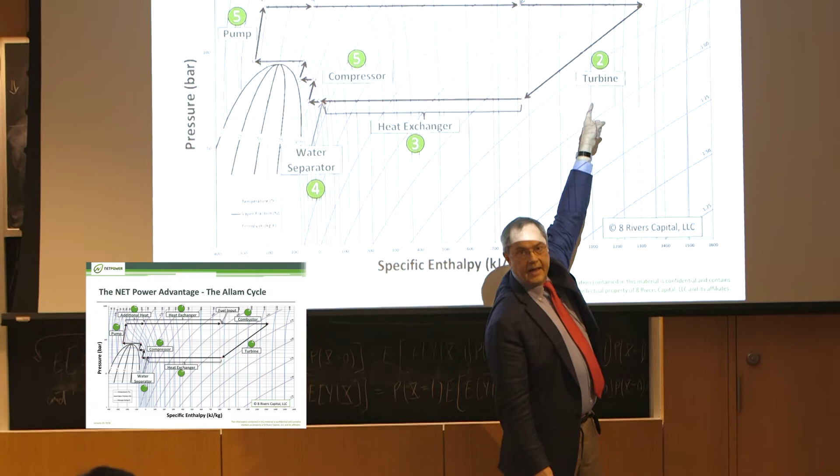So if we go from a turbine, we'll talk about how we do this, but if we go from this point here on the turbine, see where I say that little black arrow at the far right? If we go from this many enthalpy units down to here when we come out of the turbine, we gained this much energy. The left-right is the amount of energy we gain. If we're moving to the left, we gain it. If we're moving to the right, we're putting it in.

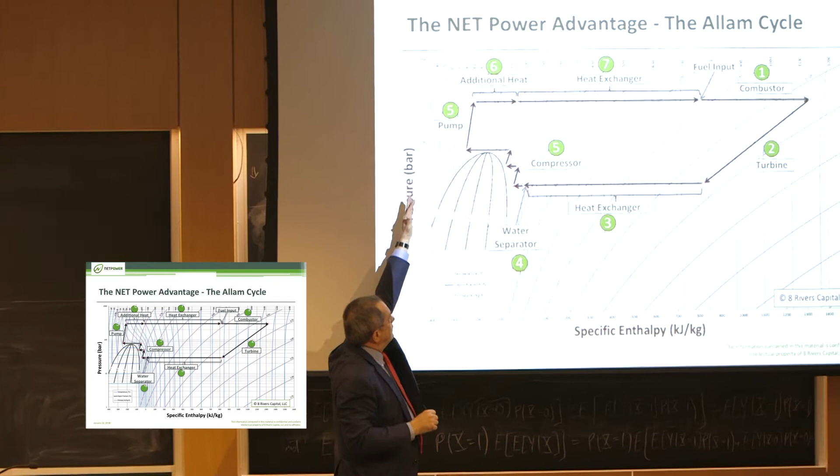The vertical axis is pressure. It's a log scale here. This is what's called 30 bar, or roughly 30 atmospheres. 1 atmosphere is roughly 15 pounds per square inch. So 450 psi at 30 bar, 30 atmospheres. The top end of this thing is at 300 bar, so 4,500 psi. And all we're doing is we're moving this fluid around this cycle.

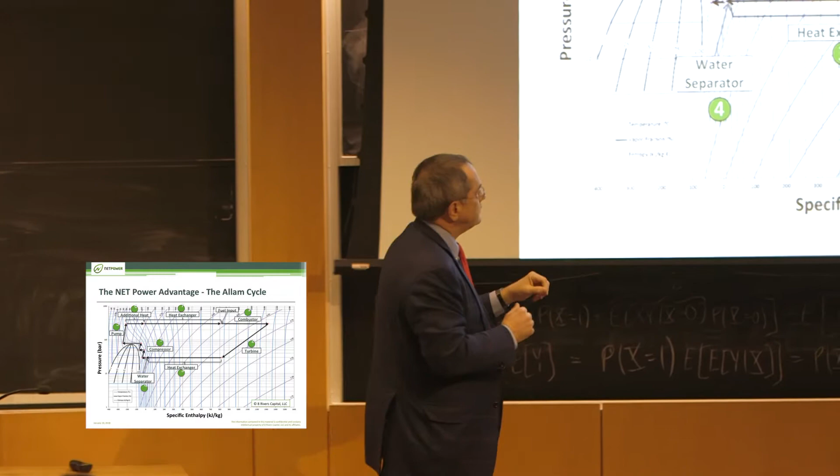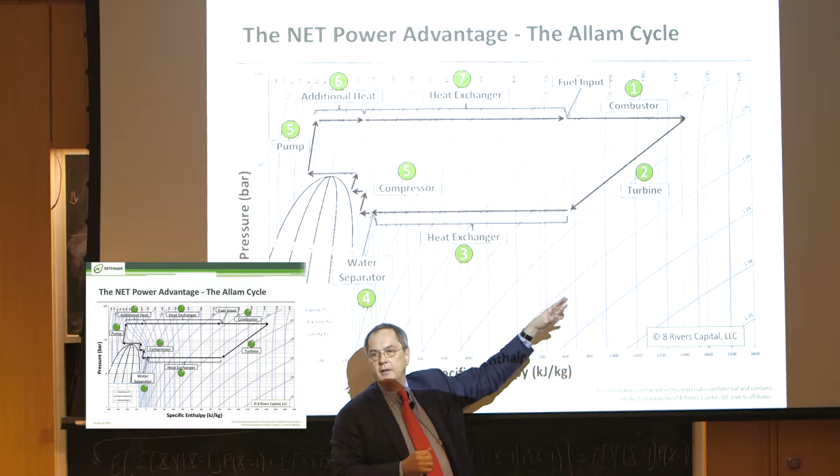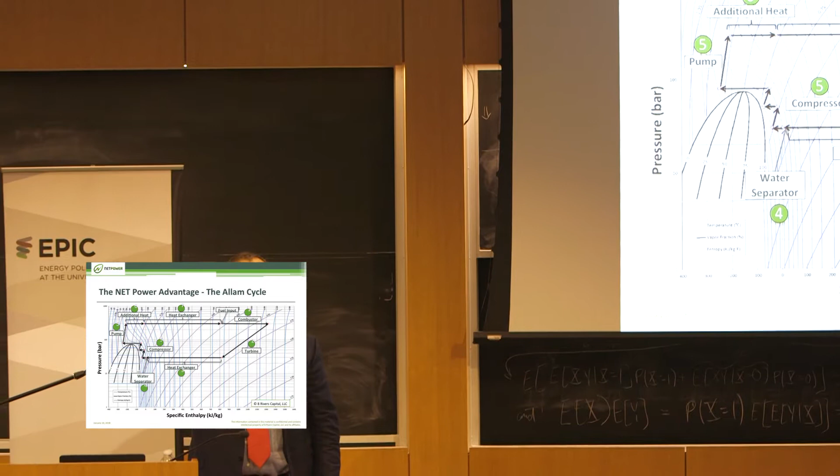Some more milestones that you should know on this chart. These blue lines are temperature isotherms. And you can see as long as we're on the right-hand part of the chart, temperature and heat are roughly the same. But then they start wrapping around this thing on the left here. What is this thing on the left? Well, it's called the biphasic dome. Above that dome, carbon dioxide is what is called supercritical. And you can see that dome comes in just a little above 80 bar.

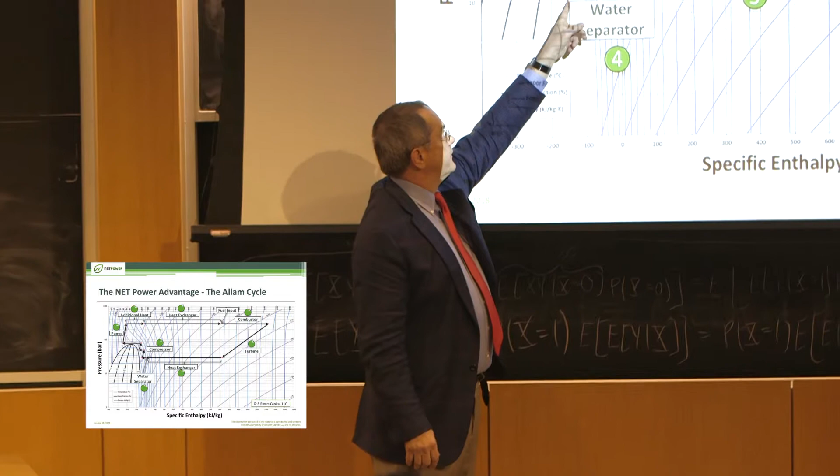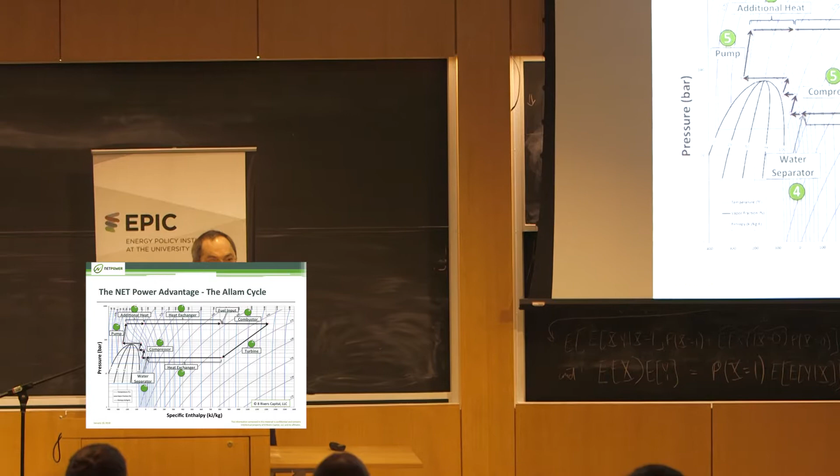Above that dome is supercritical. Below that dome to the left, CO2 is a liquid. Below that dome to the right, or out to the right of that dome, is gas. And in through here, it's biphasic. Here it's 0% gas, 25% gas, 50% gas, 75%, 100% gas. And for those of you who think back to your thermodynamics, the width of that dome for that given pressure is what is known as the heat of condensation or the heat of evaporation. It's the boiling point for CO2. How much energy it takes CO2 to go from liquid to a gas.

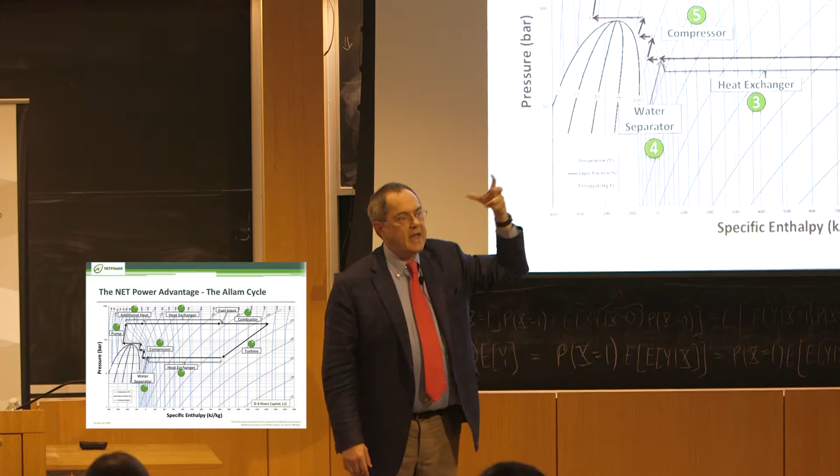So once we start going around this, it's pretty simple. The middle part of this is just simply a heat exchanger. It's like a car radiator. We're going from cold on the left to hot on the right. And then we fire it up at the top of that triangle that sort of looks like the state of Tennessee. We fire it up, and we go that final distance with heat that's added from our fuel. We take it, we expand it through the turbine.

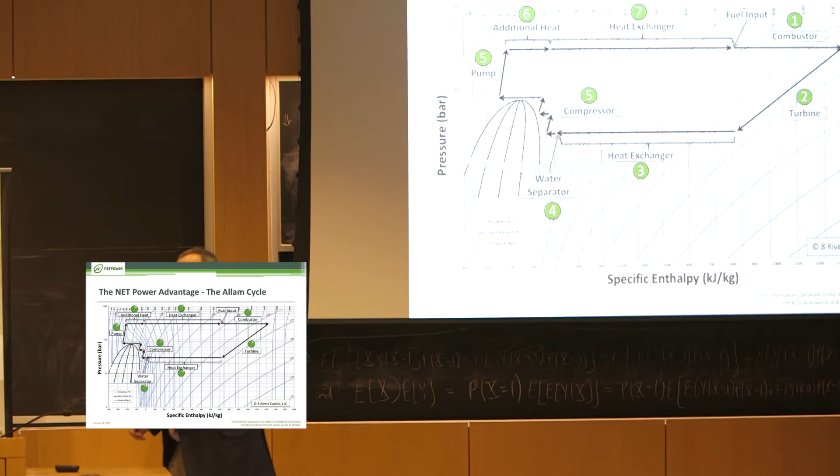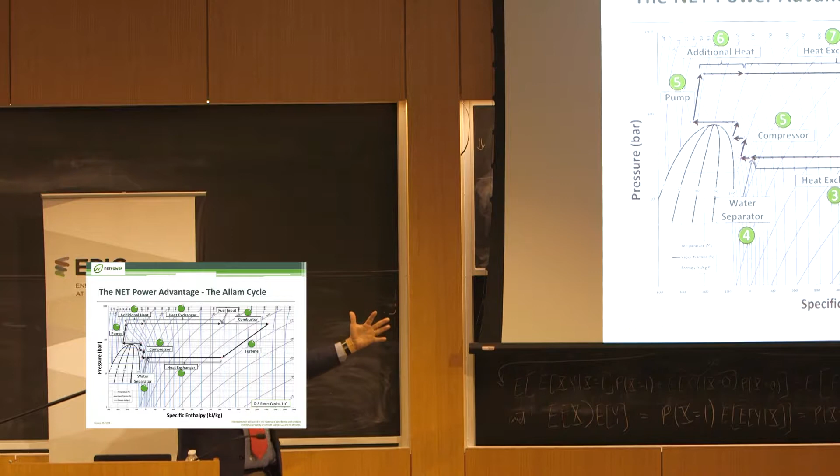Now we talk about the other lines, the purple lines on here. The purple lines are what are called entropy lines. And as you can see, entropy lines in our cycle are like railroad tracks, when we go up an entropy line, and when we go down an entropy line. Well, the entropy lines are flatter on the right, and they're steeper on the left. So that means if you're going to go up, you want to get as far to the left as possible to go up, because it's less energy. And if you want to go down, you want to come down on the right because you'll get more energy out. So that, in essence, is our cycle.

The design point of the entire cycle starts here. That is where the hot gases of the turbine go into our heat exchanger.

In the turbine, we can keep the gases away from the walls of the turbine. We have film cooling, and the turbine is cooled. There's a lot of ways of keeping the turbine from melting. But the heat exchanger is the very opposite of that. We want heat to be exchanged. We want heat to hit the metal and flow through the metal to the other side.

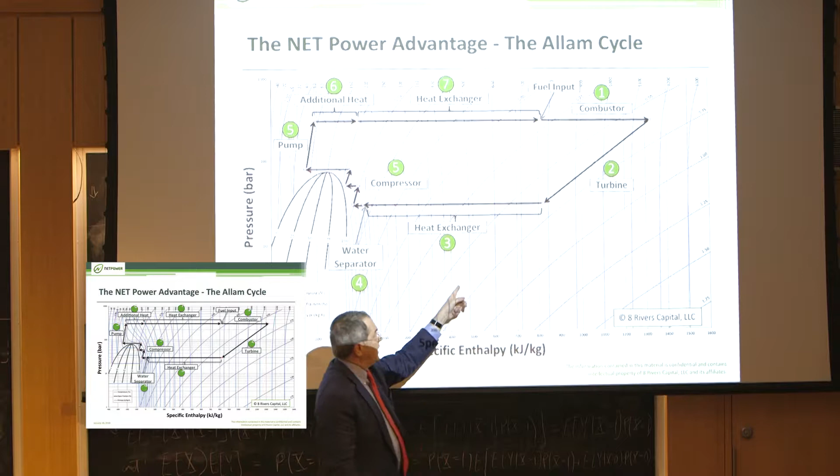That means that the left-right part of that little point down here is the design point for our heat exchanger material. It's as hot as we can comfortably get and still not melt the heat exchanger. Now, the up-down part of that line, well, you can think, why don't we take those railroad tracks all the way down here, we'll get a lot more energy out, right? Left to right. The problem is, if we get down here, we've got to climb back up here in the recompression.

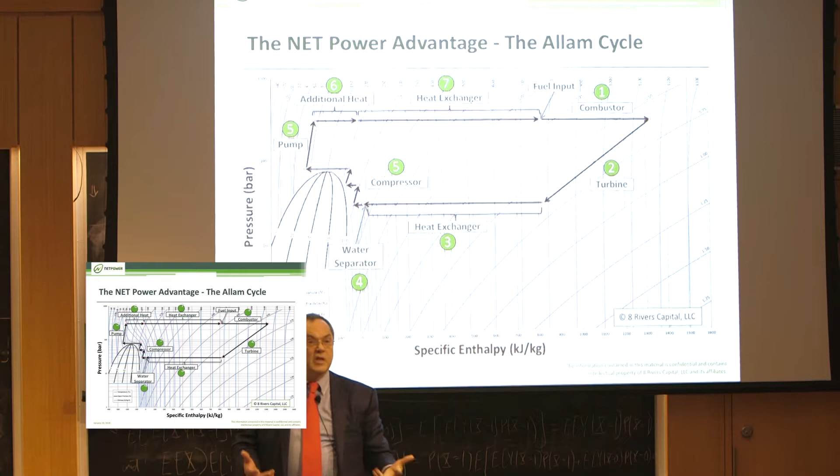So if you come down too far, you've got to climb the ladder all the way back up. That takes too much energy. But look, when we get closer to that dome, we have only a little pitch that we go through, what's called compression of CO2. We cool it over the top of that dome, and then we can pump the CO2. The CO2 is 80% of the density of liquid water. Pumping is easier to do. Pumping liquids is a lot less energy intensive than compressing gases.

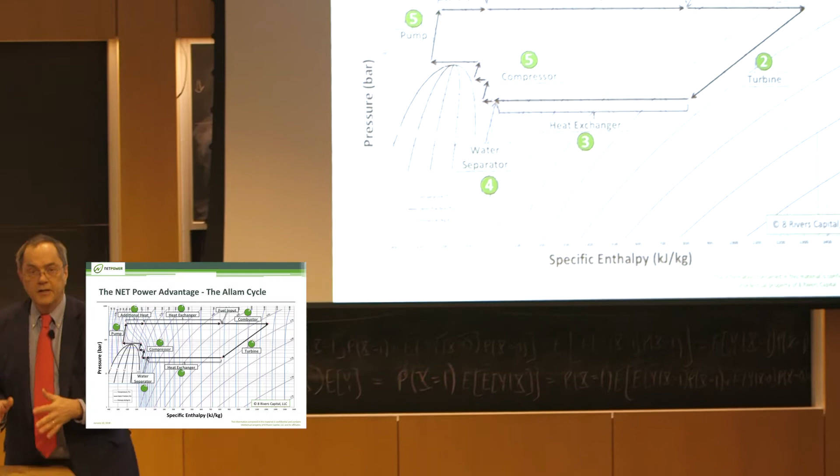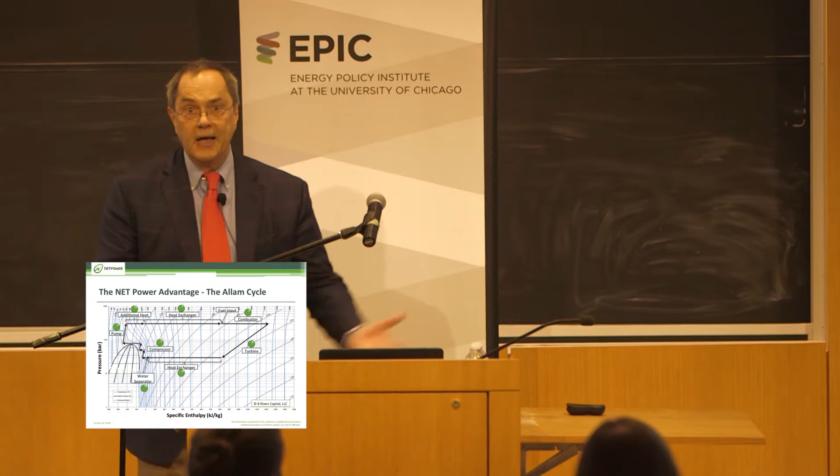Go to your filling station and try to fill a tank full of gasoline. At the same time, imagine that you had one of those little air pumps and you're trying to fill a tire just as big as your gas tank. It would take you forever. It takes a long time, a lot of energy to compress air, but pumping that liquid, no problem. That's why this chart, once you start getting into it, touches base with a lot of realities that you observe in your day-to-day life.

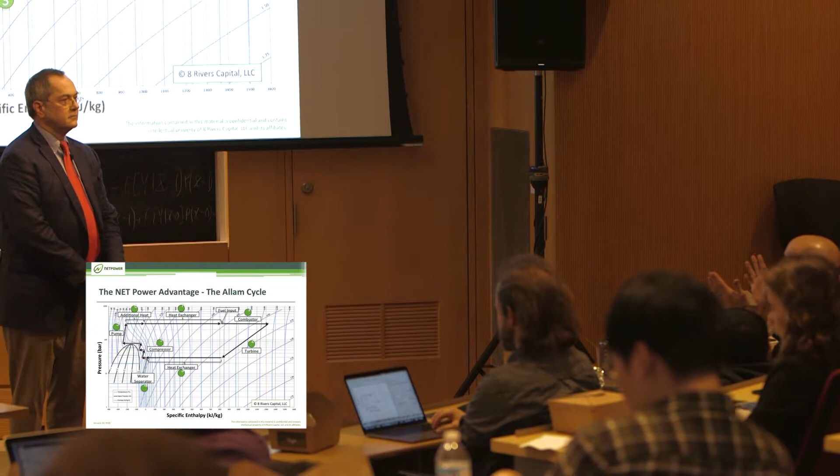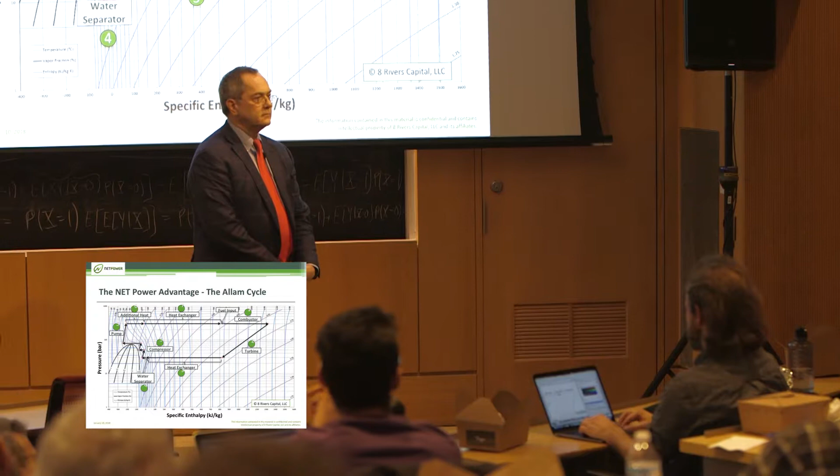Quick question about that chart. So, my neophyte understanding here is that the axes and the relationships that you're displaying are just standard ways of thinking about a combustion power plant. That's right. And what you're showing is that your cycle fits on this in a particularly important place. Not to pick on anybody, but the CCS plant, the Southern one that just bit the dust, how do I think about where people have failed on this chart before?

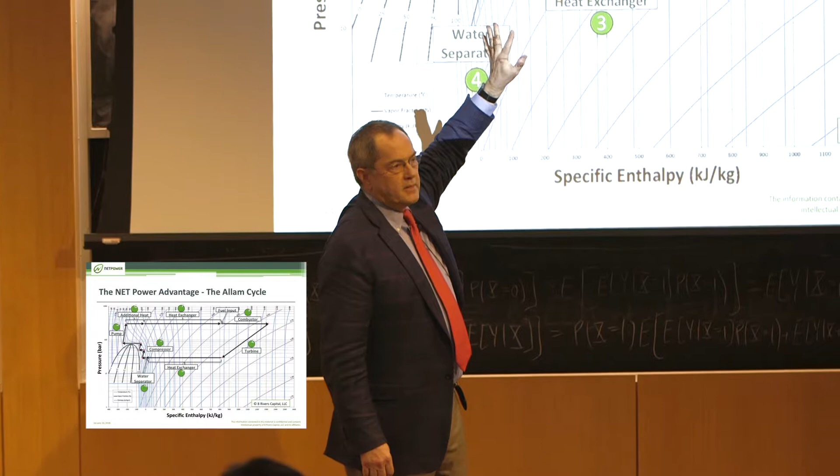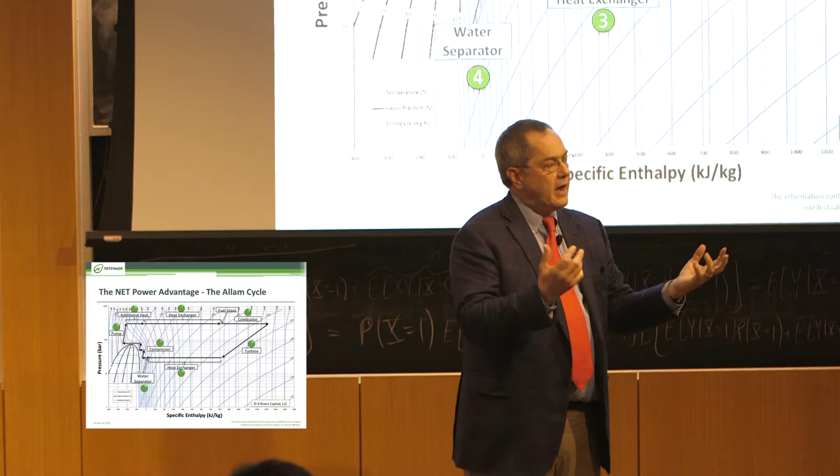Well, first of all, this is the phase diagram, a PH diagram of CO2. All the other power plants out there do not use CO2 as their working fluid. They use steam as their working fluid. But the other CCS plants, like Southern, they canceled it? They canceled the Kemper plant. They were very different than this. They were doing what's called an IGCC. Everything, they were using steam. Let's talk about steam briefly because they would be using steam.

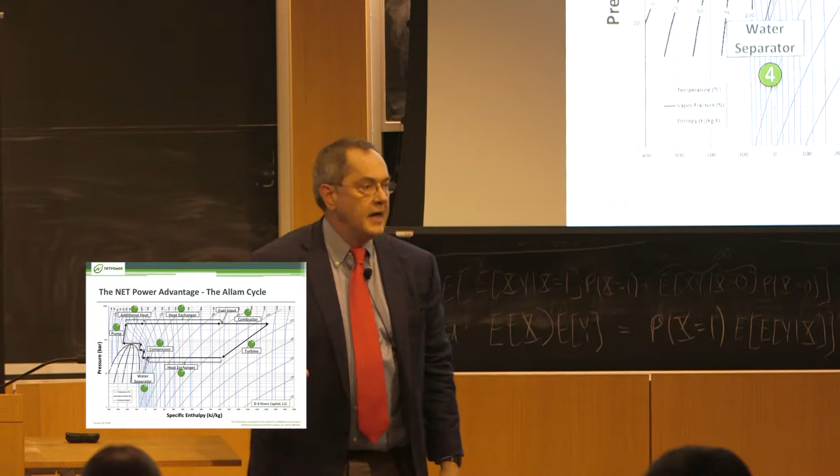Steam is actually not a very good working fluid. Imagine you're on a football field. Water boils at 100 degrees C and roughly ambient temperature is 25 degrees C. If I'm on the 25-yard line and I run 75 yards, I go from ambient to boiling. How much energy does it take me to get over that goal line? It takes me 7.1 times the amount of energy it took me to run 75 yards.

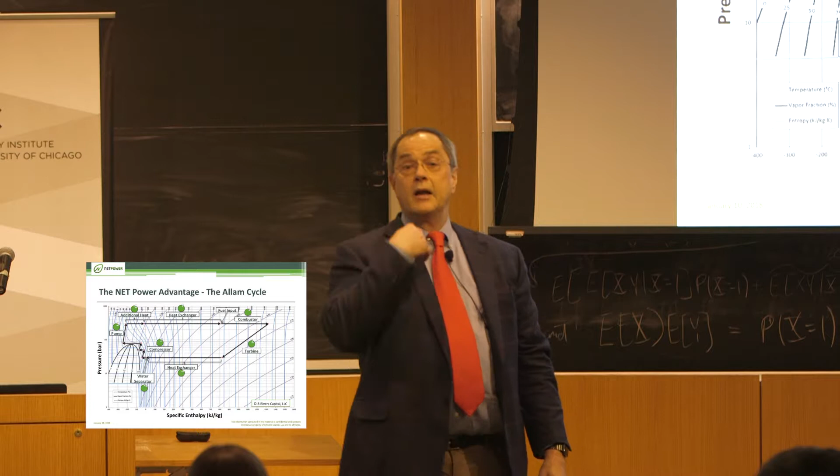The heat of vaporization of water is immense. So I've got to break through that barrier. People who said a watched pot doesn't boil are actually right. You heat it up to 99.99, and for that last little fraction of a degree, you have to heat it up 7 times more to get it to boil. And then in a steam plant, you keep running 400 more yards.

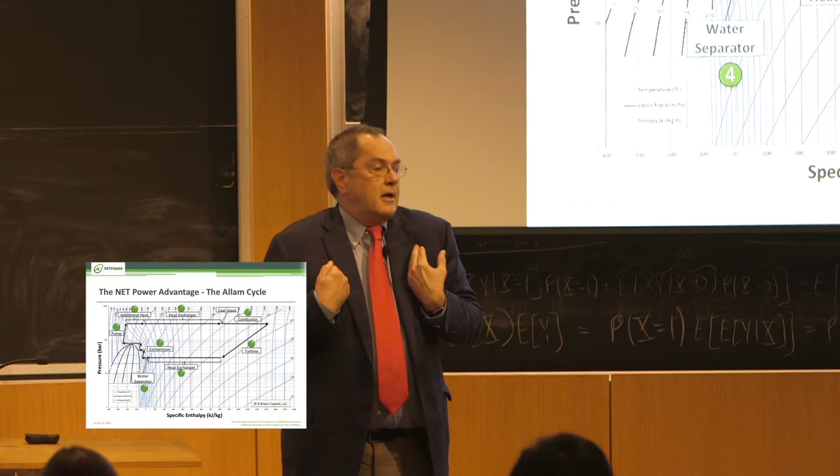And then you take that hot, high-pressure steam through a steam turbine, you drop it down in temperature and pressure, and all of a sudden you're back on the goal line, and you say, my gosh, I'm a water molecule here. If you have me go over that goal line, I will do a 1,700 to 1 collapse of volume, and therefore my turbine would actually go backwards.

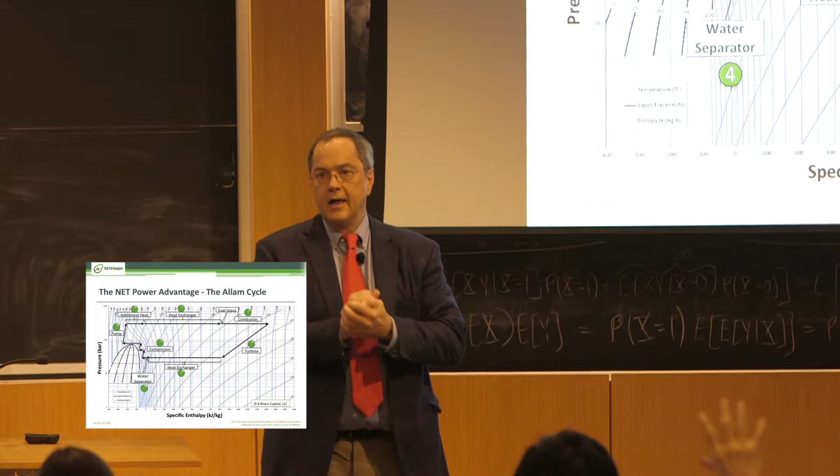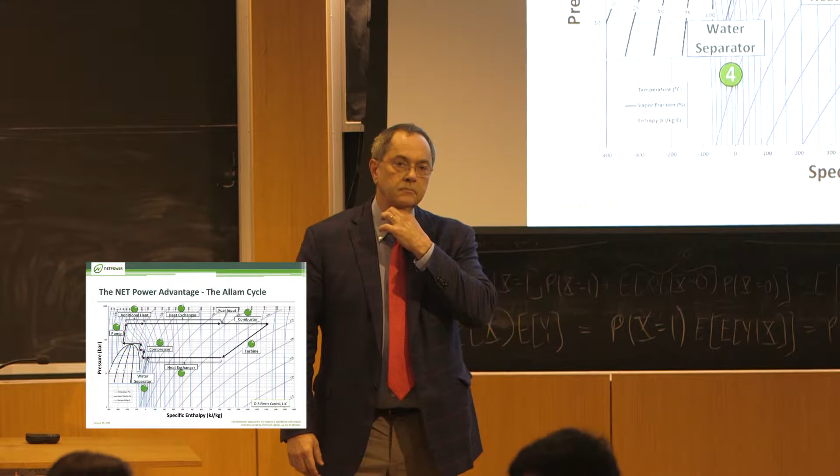But what I don't understand is you don't talk about thermodynamic efficiency at all. From the previous picture, the efficiency of the cycle you're showing is around 60%, actually 59%. Right. You can do a combined cycle plant that's just as efficient. Yes, you can get over 60%, absolutely. So why is this appropriate? Because we capture carbon dioxide and they don't. I don't see you capturing it because you can see it flowing out.

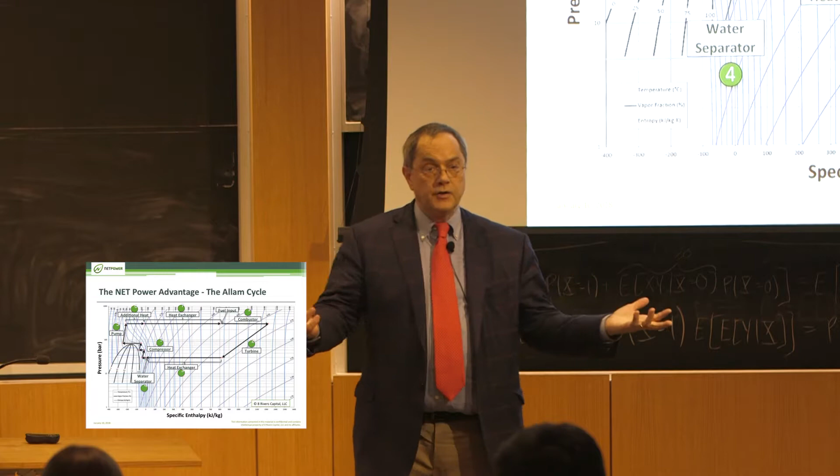We capture the carbon dioxide. You can't help but capture it, but you can actually go to your diagrams flowing out of the system. But where does it flow? That's the question. Next question is where does it flow? And there's more that flows out of this. Just to be clear, this much CO2 flows out of here. That much oxygen, that much argon, that much nitrogen flow out of the air separation unit.

What do we do with CO2? You sort of anticipated the next section. CO2 at volume and at low cost has several uses. The problem is it has never been captured at sufficient cost except for the CO2 that's currently being used for enhanced oil recovery. But if you can capture it in sufficient volume at sufficient cost, there are all sorts of things that you can use it for. It's like everything else out there. It's a matter of cost benefit.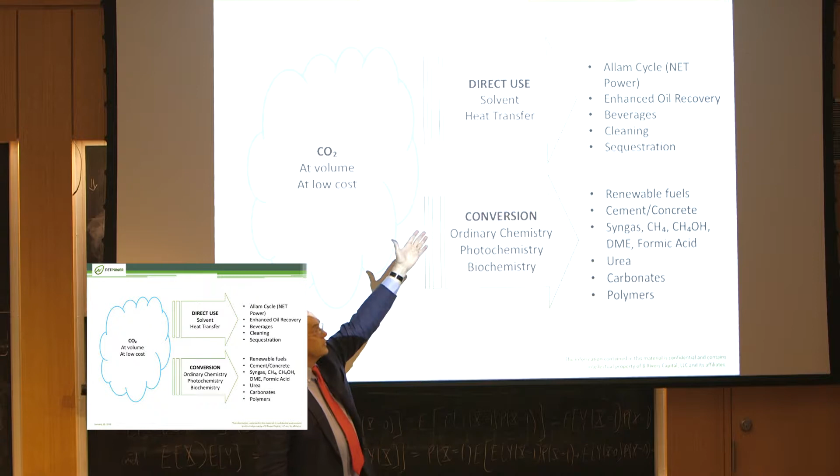Direct use: it can be used as a working fluid or as a solvent. It can be used for the Allam cycle as NET Power. It can be used for enhanced oil recovery, we'll touch that later. Beverages, cleaning. It could actually be sequestered, be put right back into the ground, and stored.

That's right. You would have to pay for CO2. Although with this particular technology, our marginal cost of CO2 is 0. We're the only technology that's ever come along that says we can give you CO2 for free. We've never been that place. Right now, the cost of CO2. Sorry?

Or you have to pay to capture it. For instance, if you were those two power plants that you talk about, the CO2 costs, if you were to amortize the right part of that cost of those add-on equipments and the efficiency hit, you roughly need $60 a ton for that CO2.

Now, conversion: we can take it into ordinary chemistry, we can use it for photochemistry, biochemistry, we can use it for all sorts of other things, cement, concrete, a lot of these other uses. The CO2 market is immense at the right price. So we see LanzaTech using CO2 for all of this. We've got Solidia, which is a BP, BASF, Oil and Gas Climate Initiative investment.

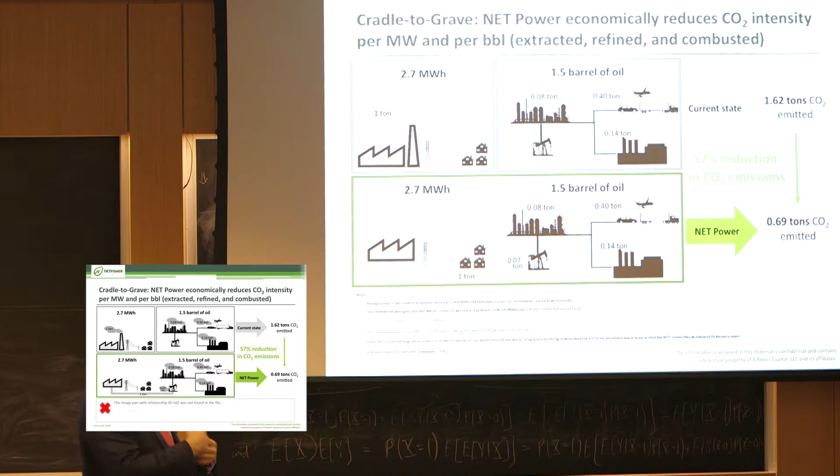And if you draw the system boundary here around both the transportation system and the power producing system, you will see that the current state for power plants, we're throwing for every ton of CO2 that we throw into the atmosphere, we could instead use that for 1.5 barrels of oil, in which case that throws back 0.08 for refining, 0.40 for the transportation fuels, 0.14 in power plants. And we would have 1.62 tons of CO2 emitted.

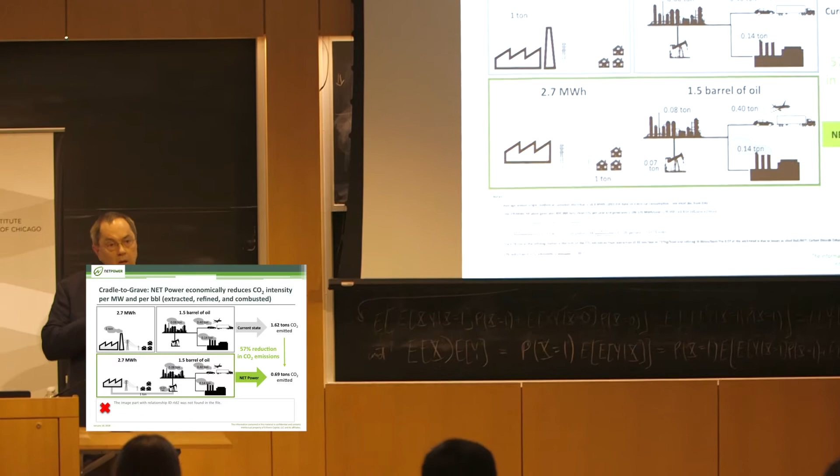If you couple the two systems together, drawing the system boundary around the two, you cut your CO2 emission dramatically. The reason is 2 carbon molecules stay in the ground for every carbon molecule you remove. Now, intrinsically, why would that happen? Well, because what's in the ground happens to be long-chain hydrocarbons, and what you can put into the ground are very compressible gases. So it's a 2 to 1 ratio.

These are perfect. Now we go back, and this sort of says what EOR is. EOR backfills oil with CO2 molecules, and it does it on a 2 to 1 basis.

Let's look at concrete. There are 2 billion tons of concrete used in the world every year, 100 million tons used in the US. Using the technology that Solidia and other similar companies are working on, they can fix 30% by weight of that volume of concrete with CO2. In fact, they can double fix it if you use CO2 at high pressure and high energy levels, and instead of carbonates, you actually put bicarbonates in these aggregates.

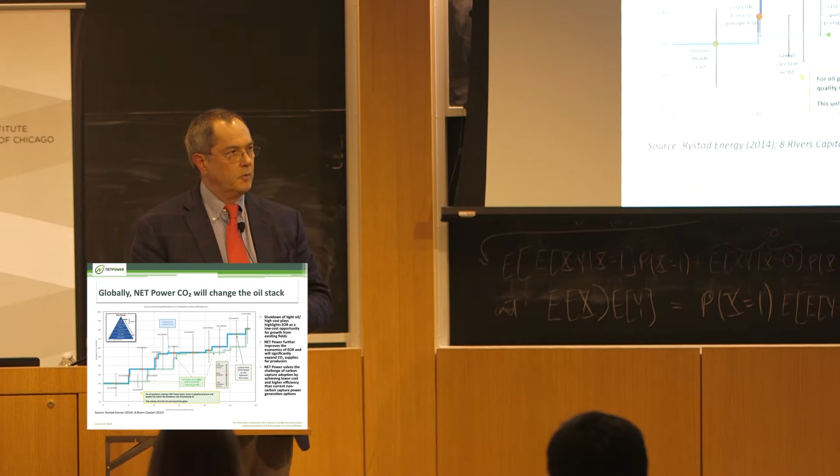The UK has highlighted NET Power in their 2017 Clean Growth Strategy document. We'll change the oil stack and the cost of delivering oil, because we'll loosen up more oil and extend the use of existing oil fields rather than having to go out and drill in places that we haven't drilled before. So there's that. We also integrate with other things.

We integrate with LNG, liquefied natural gas regasification. We can integrate directly with an EOR field, and by integrating with an EOR field, we become even more efficient because you don't have to spend all that energy separating the CO2 away from the gases. We can burn the gases with impure streams.

We can do solar hybrid, where instead of burning gas, because we're pushing heat around that state of Tennessee looking thing, we can take concentrated solar power at the top of that cycle and reduce the amount of gas that we need. Yes?

You know, this is the problem with us. We were this too good to be true technology. In fact, people wouldn't return phone calls, and at the very early stages they would just say, "Oh, you can't do this." And then people actually modeled it. At this point, I'm sure hundreds of PhD students have modeled this. Energy companies have modeled this. They've done what are called heat mass balance models.

So yes, I agree with you. Too good to be true. Sometimes that's what every breakthrough ends up starting as. They're all sitting around waiting for us to prove out that we can do all this stuff. Because why would they want to invest in an experiment that someone else is paying for right now? So this is unfolding.

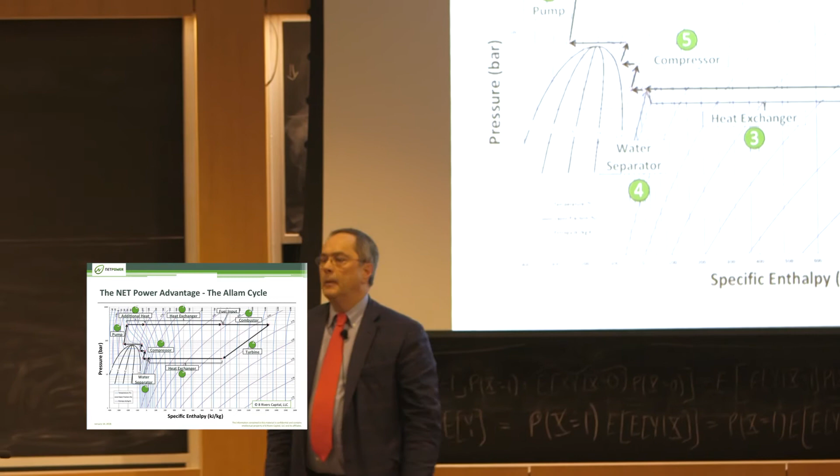Yes, sir? Where in the system do you reject the heat? We reject it in two places. If you think about it, one place is we're taking the heat in through here, this heat, and we're pushing it up, and we're using it to reheat the recycled gas flow.

Well, you have to get that out at the end anyway. I mean, you're 60% efficient, so 40% is going somewhere. That's right. So the other rejected heat is coming out of here, this dome here. I mean, you have cooling towers, water, you're not rejecting it through the river.

Let's suppose that, just put this model in your head. Let's suppose that we have system losses of 10% and 90% of it's generally used for something or rejected through cooling towers. So in our case, a little over 10% is rejected in cooling towers. Another 10% is used to produce electricity that will fund my air separation unit. And another 10% is used to produce electricity that will fund the recompression.

So our total efficiency for the entire process on an electrical basis happens to be 83%, which means that 17% is going into cooling towers, into the air, and system losses. But the rest of it is sort of staying in the system. It's to the air. That's right, to the air or friction losses or things, yes.

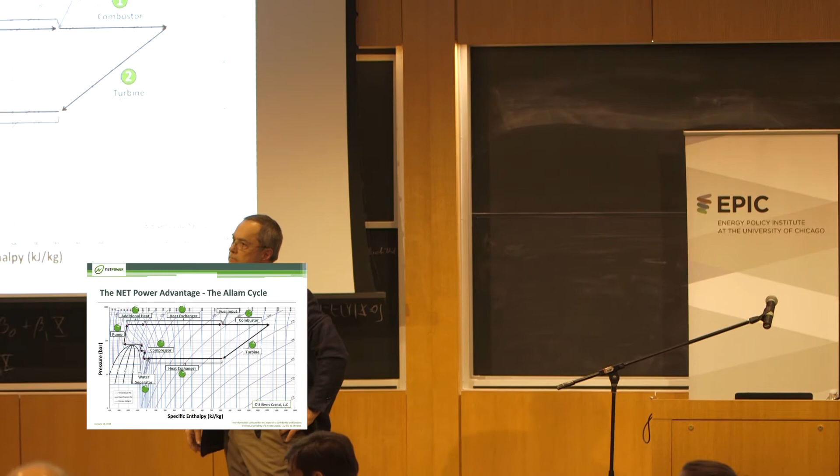When was this invented, and is there any demonstration in a lab? First of all, CO2 going round and round, but there's 5,400 miles of carbon dioxide pipelines in this country, which means that we know what compression of CO2 looks like. We know this left-hand part very well, compression of CO2 and pumping of CO2. It's well known.

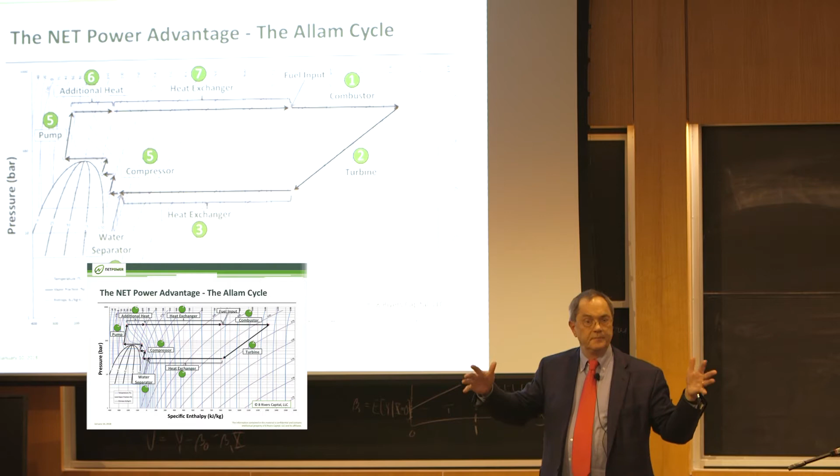As far as heat exchangers, it's an advanced heat exchanger. And as far as the turbine, we're just moving a different working fluid. Now, why hadn't this been thought of before? is another question I get. It's this: we did three things that other people didn't do. People always knew CO2 had special properties. People tried making argon turbines. They tried to make turbines out of all sorts of things.

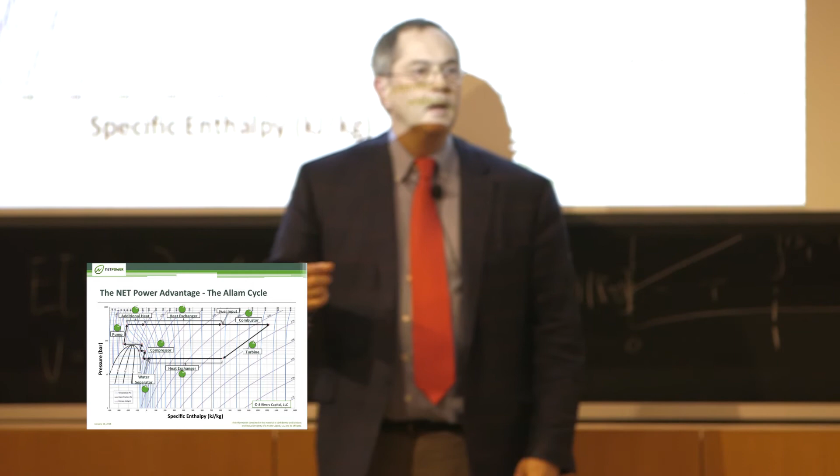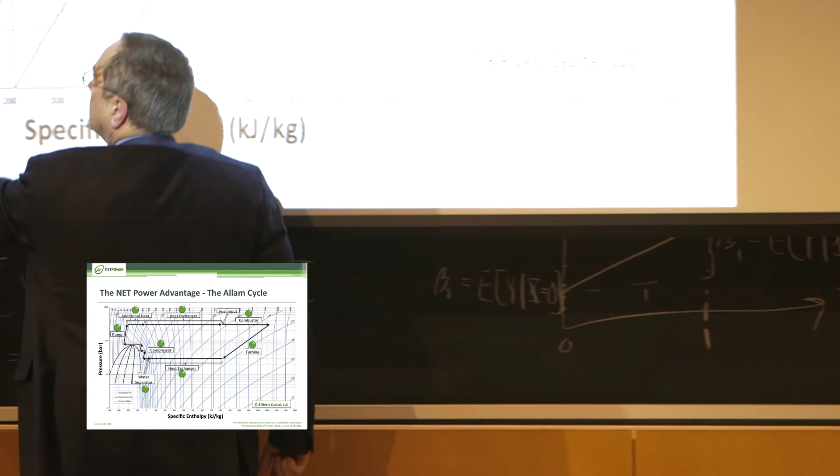Look at the back of your refrigerator. You've got something that used to have Freon in it, now has other stuff in it, but it's a matter of taking heat, compressing it, and moving temperature around. Compression, expansion. So we know about compression and expansion of working fluids. But Mitsui Babcock in '05 did a version of this cycle down here. And they stopped. They just stayed in the lower half.

And this brings up something I like to say: people generally think when you do a thermal cycle, there are three rules. First rule, one part of the cycle has to be at atmospheric pressure. Second rule, one part of the cycle has to be at ambient temperature. And third rule, if you've got some heat and you don't know what to do with it, boil some water. And that's sort of what they've done.

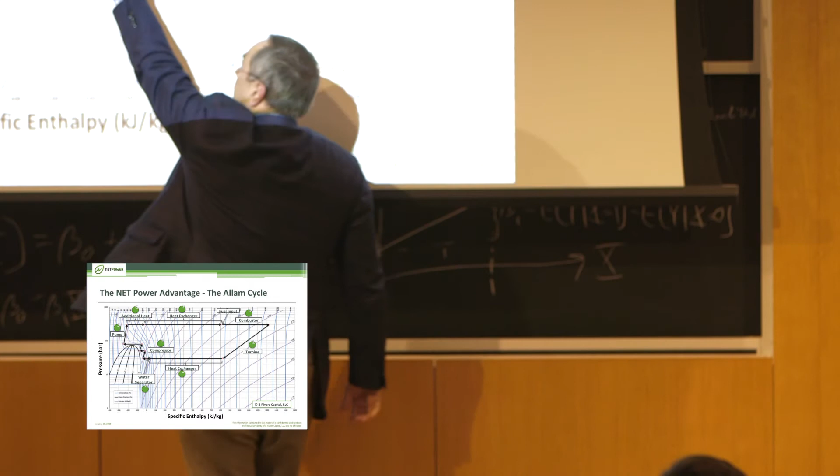We violate two of those rules. We don't boil water because we're using something totally different. Water, for all those reasons of the football field, is a very inefficient working fluid. And also, we start at 30 bar, not atmospheric pressure. And so by starting here, something interesting happened.

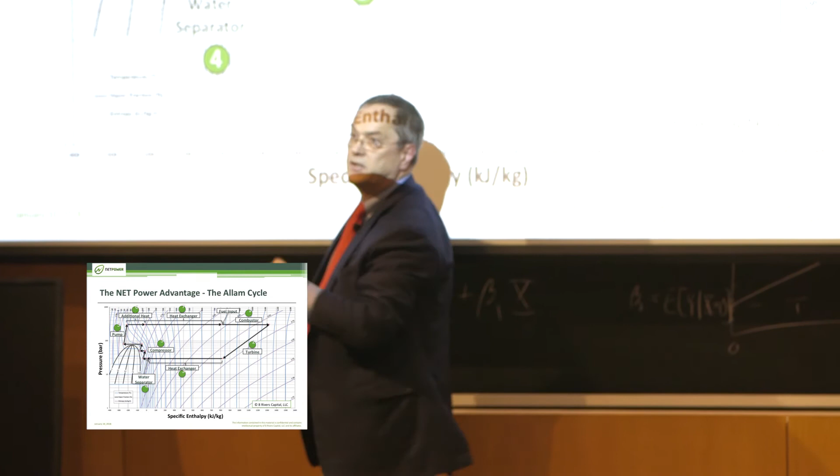The recompression piece: we knew that we could recompress all the way up to the top. But people thought, why should we cool and then pump the rest of the way? And if we cool, where do we get the energy back? Well, look at what's happening at the top of those blue lines where I say number 6, additional heat. That's going from a little over 50 degrees centigrade up to a little under 160 degrees centigrade.

That's what generally is called waste heat. People don't think that heat is worth anything. They always assume that something below or a little above boiling point can never be used. Normally that heat is coming off of compressors, pumps, and your air separation unit. They never thought you should scavenge that heat because it's too low. And yet, at 300 bar, with carbon dioxide, that heat is worth a boatload.

Quick question, the number 3 and 7 heat exchangers just going out, are they physically connected? Yeah, they're physically connected. So it's like your car radiator. You know, when you turn on your car in the wintertime or most of the time in Chicago, cold air blows out.

What has to happen is your engine has to get hot enough so that the water that's circulating through the radiator is hot, so that when the air sucks in across that hot radiator, it blows warm air against your feet. And that's a heat exchanger. Now, normally, that hot air is going outside your car and into the atmosphere, but it's going on your feet when the heater's on.

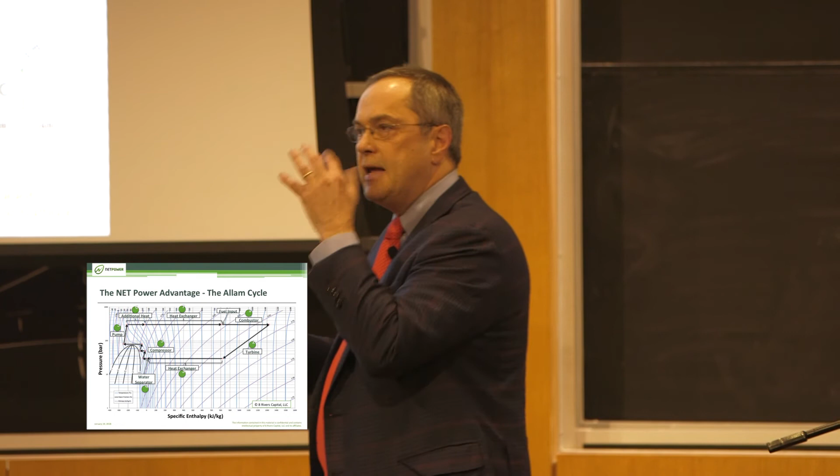A heat exchanger is exchanging heat between a hot side and the cool side. And so, I have to admit, a heat exchanger is one of the hardest concepts to wrap your head around. You can understand why two things will stabilize at the same heat. If I open up my window, the inside of my house will be the same as the outside of my house. I get that.

But if you were on the outside of your house and you touched your window it would feel warm. And if you're on the inside of your house and you touch the window, it feels cold. And that window is a heat exchanger. It's making the cold warmer or the warm colder. And that's what's happening here.

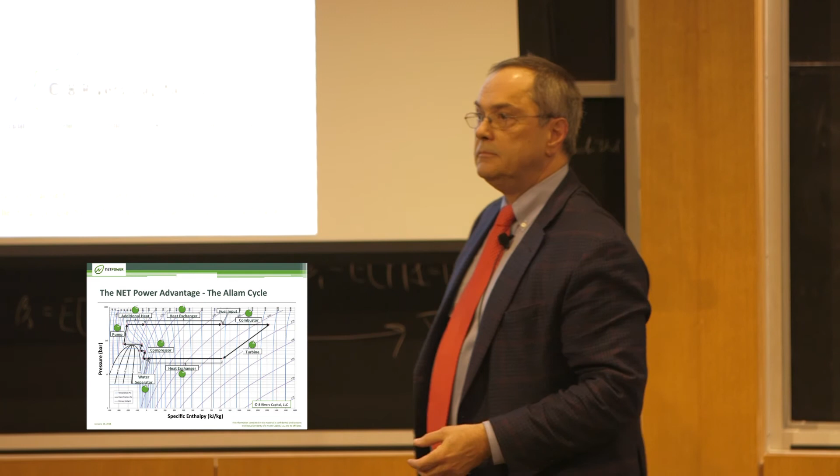That was just my lead up. I think we have time for one question. Okay. You said the new part is the CO2 turbine, using CO2 as working fluid. Does that exist? Yes, Sandia Labs has made CO2 turbines. Other people have made CO2 turbines. So I'll come back to that. But you said one more question.

One more question. So I wanted to follow up on that, because I remember seeing a talk by some of the Sandia guys maybe 5 years ago. So maybe they've addressed a lot of this. But I remember they were running into quite a few challenges with CO2 turbines. They're great. They're smaller. They're high power density. But I remember they were having trouble. I don't remember what the trouble was.

They had several. The biggest trouble that Sandia had is Sandia was purely running a closed loop, like your refrigerator. Because they were running a closed loop, and because CO2 is such a great solvent. About 15, 20 years ago, people were opening up CO2 dry cleaning shops. It's a great solvent for organic compounds. It's such a good solvent that it helps you remove caffeine from coffee.

It's a great solvent, and therefore all the oil around all the bearings got out into the working fluid. And so that whole Sandia turbine was just an oil vapor machine. So they had a problem with their bearings, and they had an unusual concentration of oil. There were a lot of things that they learned. The other problem that they had was this, and I'll end it here.